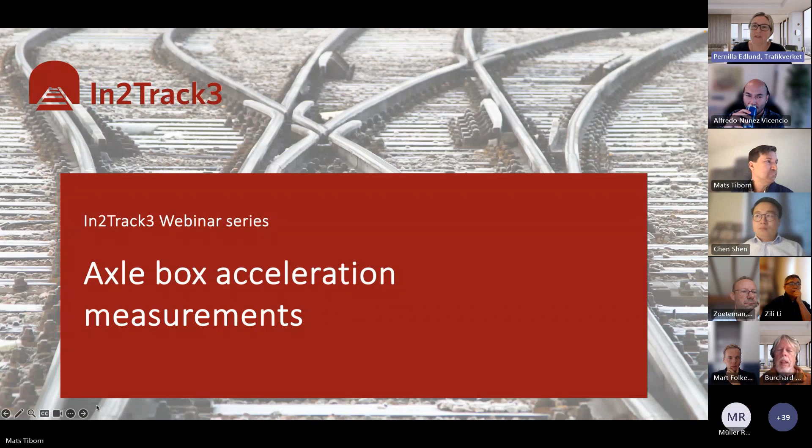I am the coordinator of the IN2TRACK3 project. We started out in 2020 and we are finishing now in 2023. So we have a few months left to go and we're approaching the end with some really nice results and some really nice research. This webinar series is a part of that. We want to share this with you and tell the world what we have done because it's really interesting. So can we move on?

Briefly, the IN2TRACK3 project consists of 26 partners in 11 countries in Europe. It's a European Union project, and we have all sorts of participants, meaning that we have infrastructure managers in the project. We also have the people taking products forward, and we also have universities and research institutions, which give us a broad perspective on how to tackle the issues in railway research. And we try to do that as much as we can. And we also have other projects preceding us, and we can look at them on the next slide.

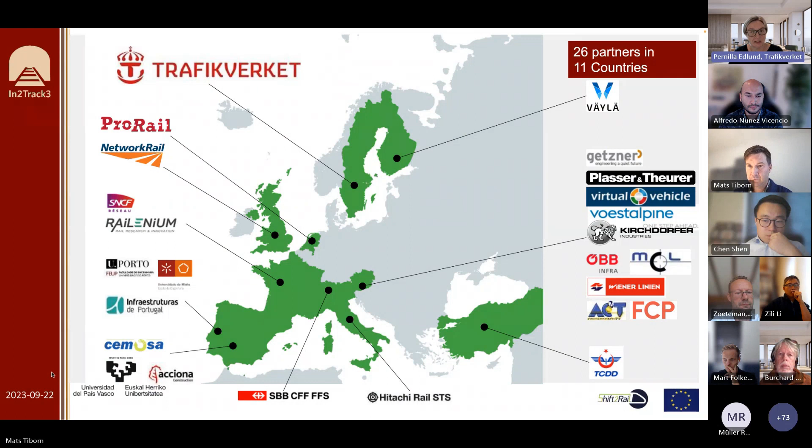Because IN2TRACK3 builds on the work in IN2TRACK2, IN2TRACK1 and In2Rail, and before that other projects as well. The pictures below are merely an illustration of how we have progressed into higher TRL levels. IN2TRACK3 has the aim of having as many TRL 7 products as possible, and we are reaching that goal pretty well. We have over 30 demonstrators showing TRL 7, which means we demonstrate it in an operational environment, which we do in all sorts of aspects of this. We can take the final slide, please.

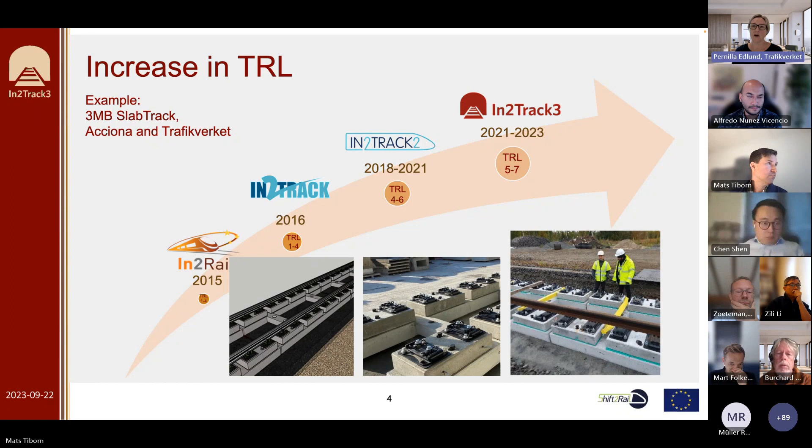This is only showing a few of the things that we have taken forward and which will continue in projects after this and will continue to be worked on. It will move on to other projects as well and other research. Some are very close to industrialization and they will move on in that direction, while other things need more research, more inventions and innovations to function properly. But this is towards the end of the IN2TRACK3 project, so please hear what we have to say on the axle box part.

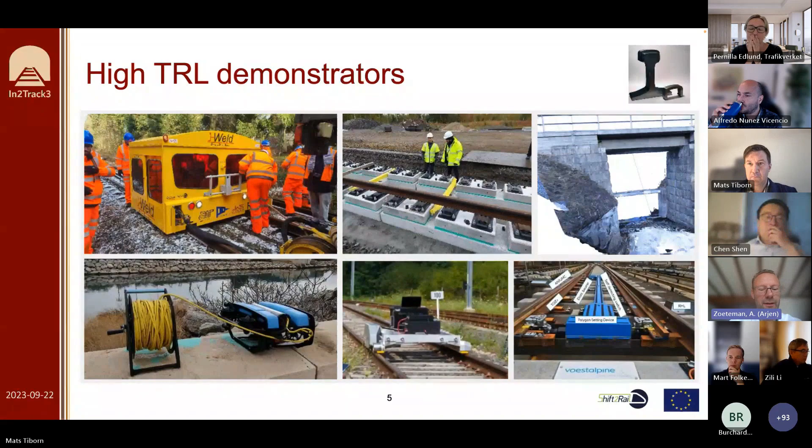We are a member of the IN2TRACK projects; we started first with IN2TRACK2 and then also IN2TRACK3. So we were not there from the very start. But I'm a big fan of what you just showed, also on dissemination and the innovations that we do. It's really worth it for all to check out the website of IN2TRACK3. It's really good. And I think today is also an example on axle box accelerometers. We want to really present to you what we've done.

The research we do on it goes back many years already, together with, for instance, Delft University of Technology, which has been leading it in the Netherlands for many years. And now we also brought what we have developed with ABA into IN2TRACK3, and are continuing that in the EU-Rail project. So we will show what is the state of the art at this moment. There will be presentations from TU Delft, and afterwards we also find it very important to have some application from practice and some feedback from the market. So that's why we approached AssetRail as a user in the Netherlands.

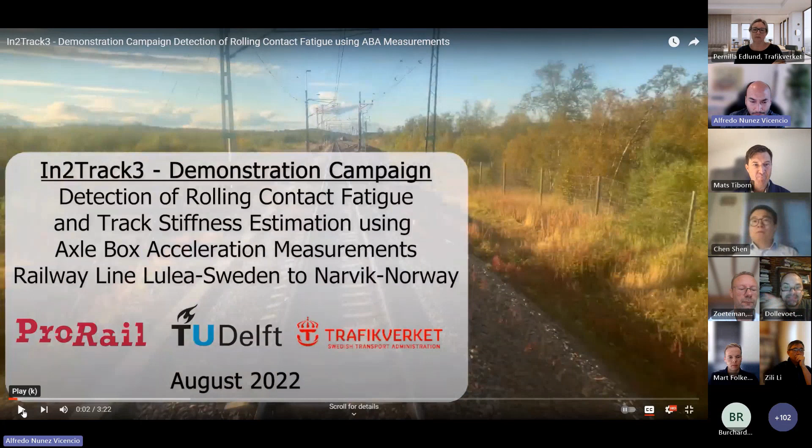And before I give the word to Alfredo and Chen, who will present on what they've done in In2Track3 specifically, I think there is a video to demonstrate. And Alfredo, you will start it. I hope the sound's working. Yes, so I am sharing now the video. Yes, I will put play. I don't hear sound yet.

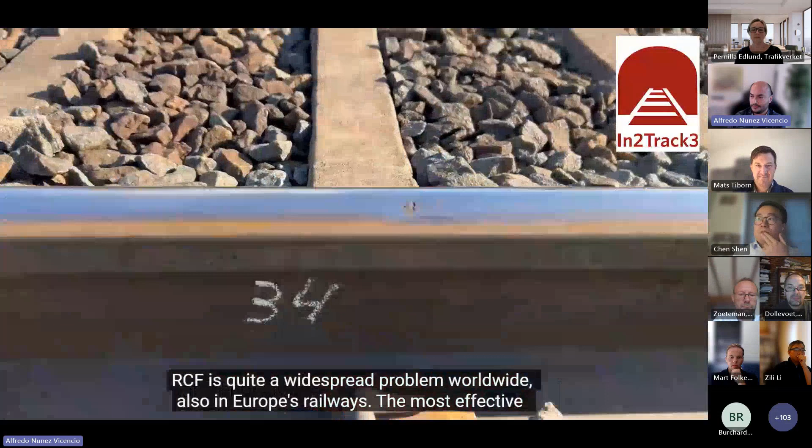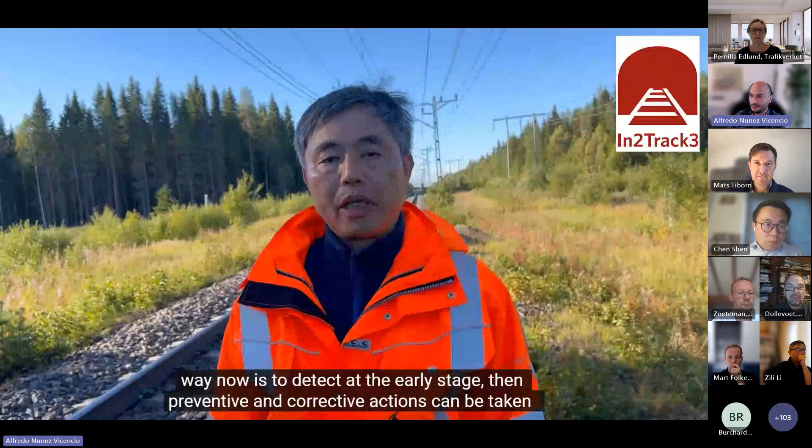Welcome to Sweden. We are on the line between Luleå and Narvik in the demonstration campaign for detection of rolling contact fatigue for the project In2Track3. It's a cooperation between ProRail, Trafikverket and TU Delft. RCF is quite a widespread problem worldwide, also in European railways. And the most effective way now is to detect it at an early stage. Then preventive and corrective action can be taken as soon as possible. And one of the challenges is then to develop an early detection method. This is what we are now doing, and also demonstrating not only in the Netherlands but also outside.

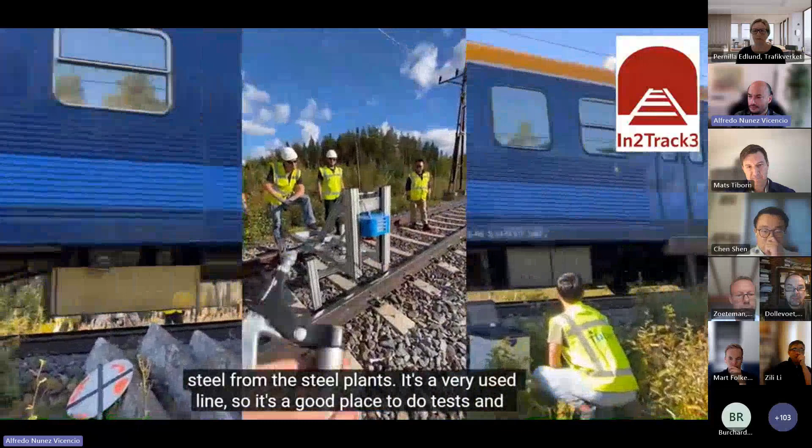I think to have this type of monitoring in service is really efficient for us in Trafikverket, because we can use this for decision making later on. We're at the southern part of the iron ore line between Boden and Luleå, which is quite a trafficked line, both with passengers and the iron ore and the steel from the steel plants. It's a very used line, and so it's a good place to do tests and developments to use all over the rest of the network. We are heading to Narvik in Norway.

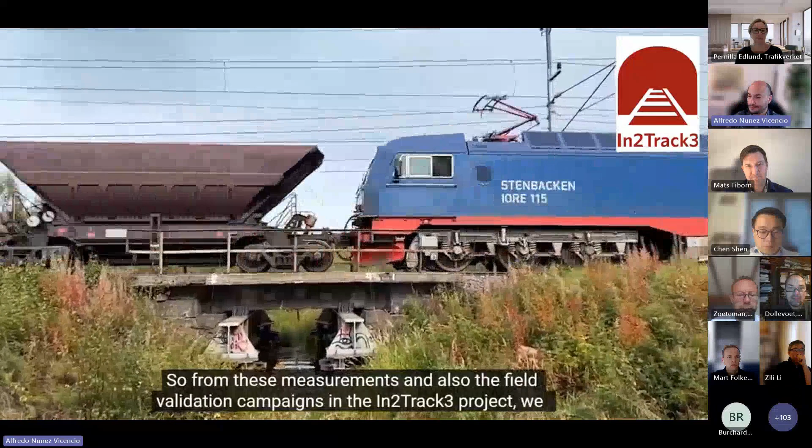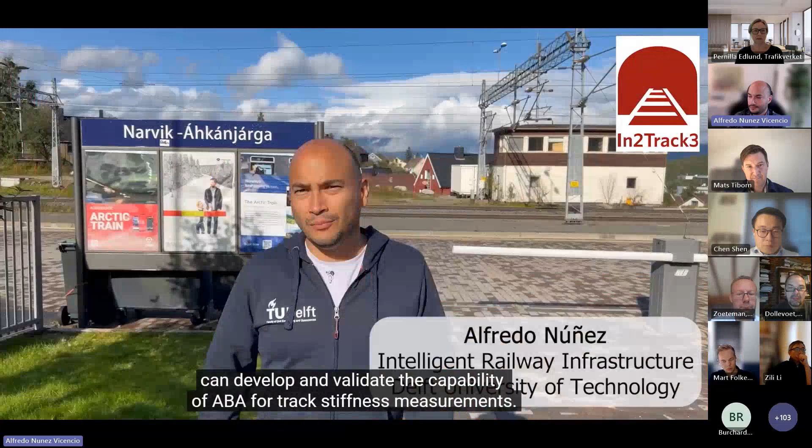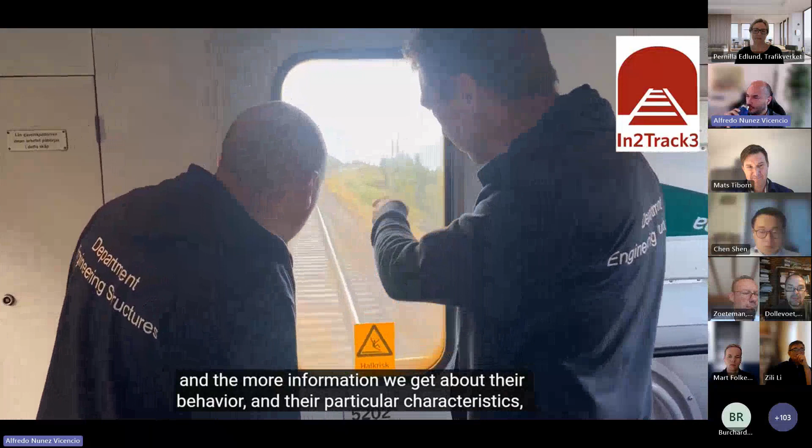So on this train we have axle box acceleration measurement. From the ABA measurements, especially from the frequency domain of the ABA signals, we could get different characteristics of the stiffness of different layers. So from these measurements and also the field validation campaigns for In2Track3, we would hope to develop and validate the capability of ABA for track stiffness measurements. So part of the research is also to have a better understanding of freight-dominated railway lines. And the more information we get about their behavior, the particular characteristics, then we can further extend the monitoring methodologies. This one will grow, and we can measure it with the ABA system that we have seen.

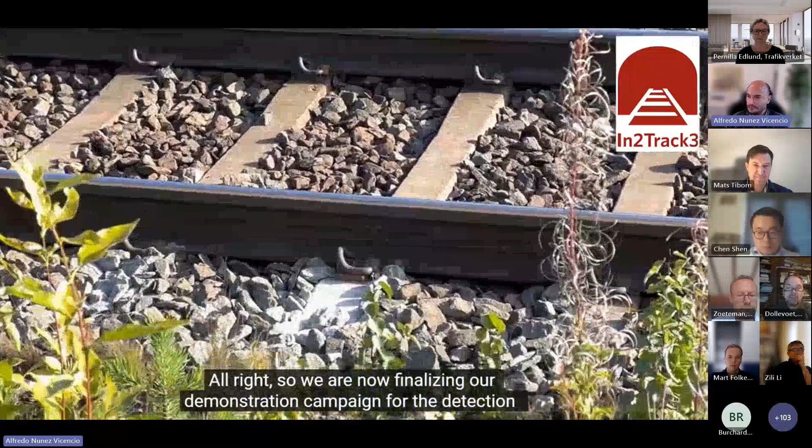If we come back in a couple of months, we will see that the spots will be bigger and bigger and bigger, and finally this rail will break. If you don't do anything, it will break. All right, so we are now finalizing our demonstration campaign for detection of rolling contact fatigue. So we thank a lot the colleagues from Trafikverket that arranged everything and made this campaign happen. And we will see each other soon, I hope.

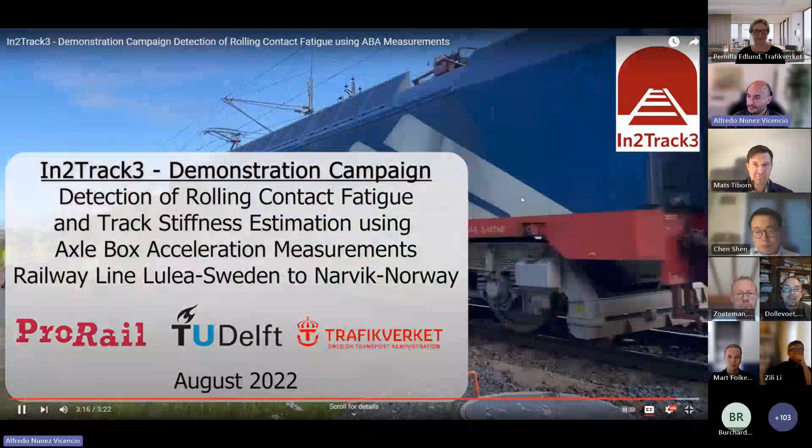Yes, thanks for the video. So that's already an appetizer, I think, for your presentations. And yeah, I think this technology will have a lot to offer.

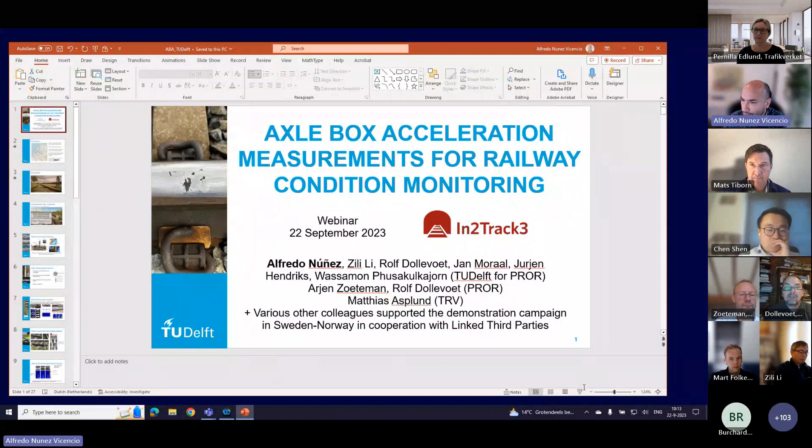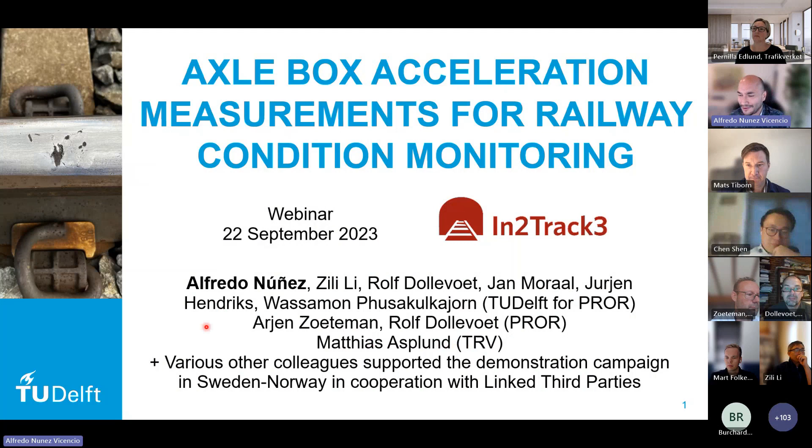Okay, I'll try. So welcome everyone. It's great to have a lot of participants today in this webinar. I'll be talking about axle box acceleration for railway condition monitoring. In the campaign for In2Track3, we have a lot of colleagues involved. So from TU Delft, from ProRail, also Matthias Asplund from Trafikverket, and also other colleagues that supported during the demonstration campaign.

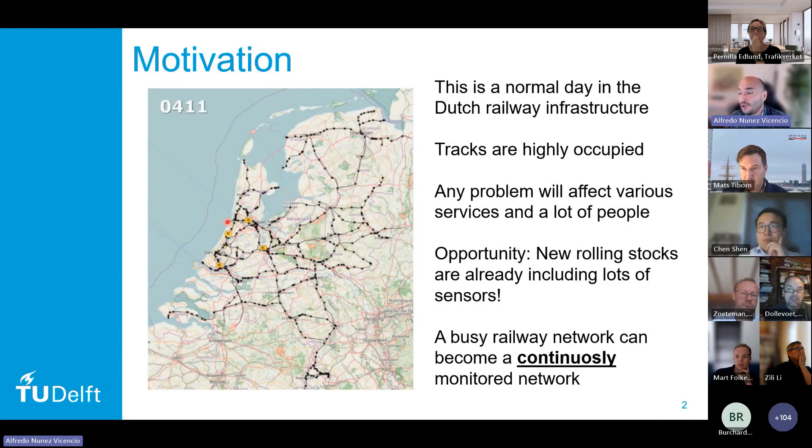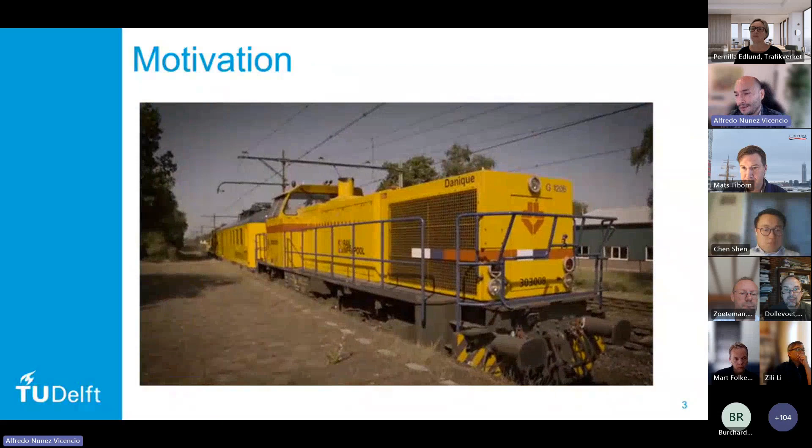And whenever we need information in one region, we could activate the rolling stock that is passing by there, maybe not just with ABA, but also video cameras, lasers, and so on, and we can extract updated knowledge almost in a continuous way about the railway track. So this is the motivation for us to work with monitoring systems that are on board, ideally in passenger trains, to instrument them and collect all the information while on the run.

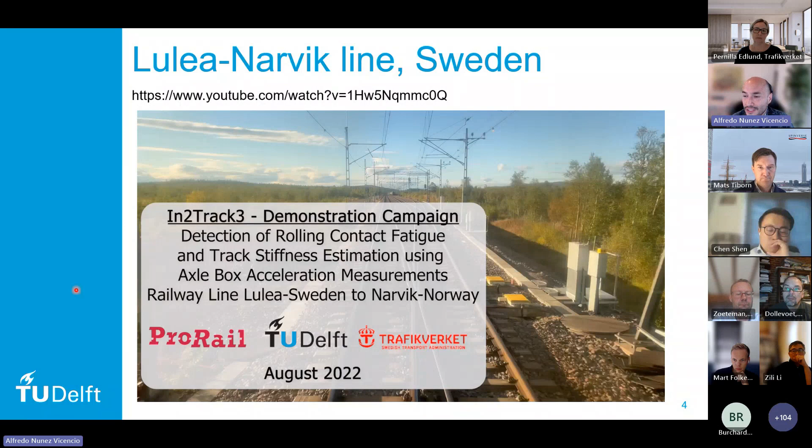Here you can see a video of the CTO train of TU Delft that we use for research. We have tested different technologies in the Netherlands. You saw already the video about the campaign we did in Luleå. In this case, the CTO train was not taken to Sweden, but the colleagues that have the expertise on mounting the technology went to Sweden to install it in a passenger train.

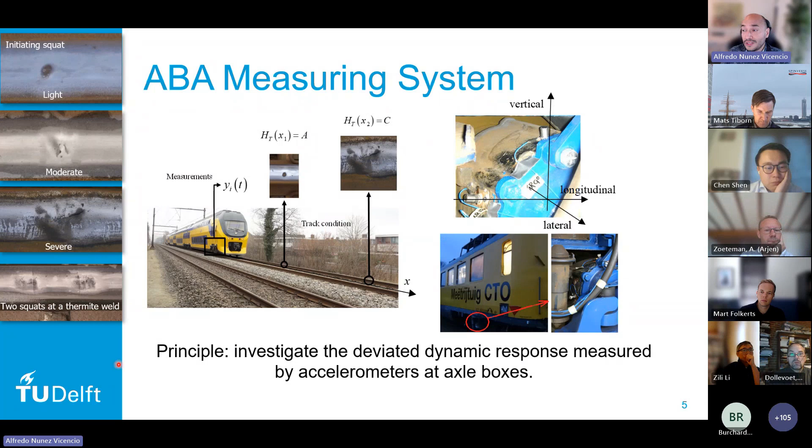In the measurement system, we collect information from the vertical and longitudinal signals. And by using the physics of the problem, the modeling approaches that allow us to understand the track behavior, the ABA behavior at components and at defects, we make use of signal processing techniques to extract all this knowledge and to provide information about the condition of the track.

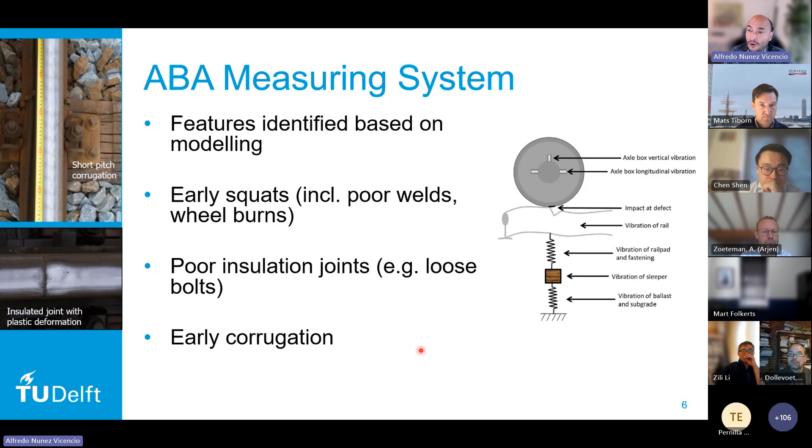Here we have frogs, and the ABA can assess their condition, and also evaluate the quality of maintenance work. In a nominal condition you have a certain response energy level. Once it's degraded, this energy changes. After the frog gets repaired, you can measure again what's the quality of the repair operation. In this case, the signal energy actually increased, so you could use ABA to evaluate the maintenance work.

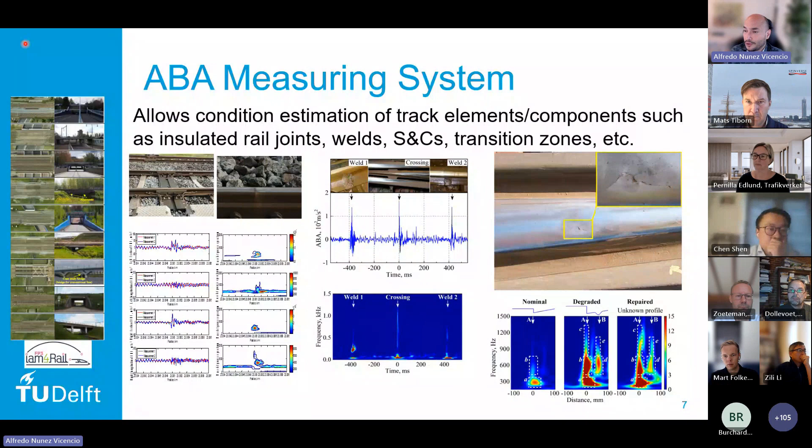Here you can see examples of squats found in the Swedish railways. Let me explain the general principle. At moderate and severe squats, the ABA generates a certain response. Looking at the time frequency analysis shows us the frequencies that are activated. For a certain speed, you typically have a low frequency band that becomes dominant for severe defects. But because squats are short events with small duration, they also excite higher frequencies.

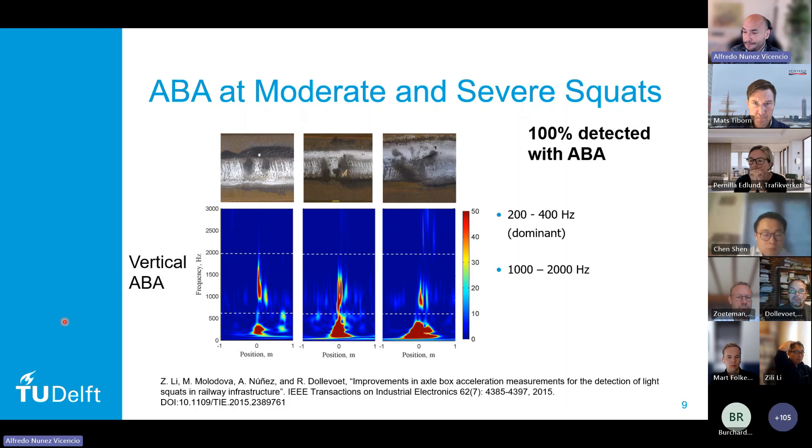For light squats, the technology we've been developing at TU Delft also considers longitudinal signals. Smaller defects create even shorter time duration of excitation. In the case of early stage defects, once they appear and start to evolve, they appear more and more frequently in the signals. There's a moment when we see light, invisible defects that, after every train passing, report an impact, which allows us to claim the system can systematically detect and monitor them because of the physical response.

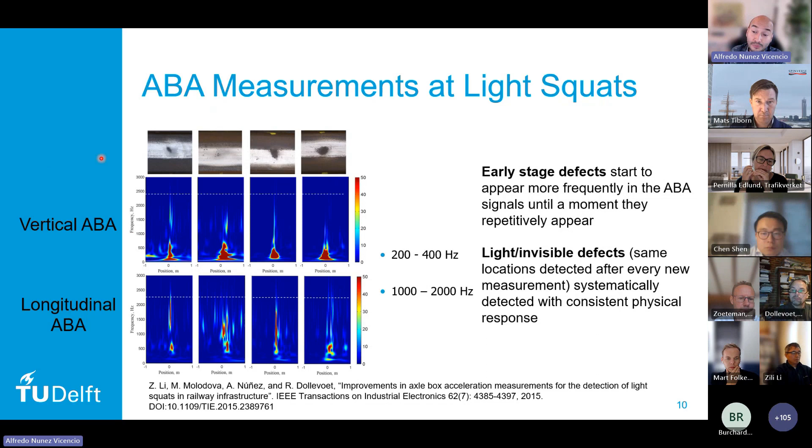Why detect early defects or later defects, and why do it continuously? The reason is that some small defects are candidates for effective grinding—meaning that with a certain depth of grinding, you can completely remove them from the rail surface. But when defects grow too much, grinding won't be effective; you can apply grinding, but the defect will appear again and again.

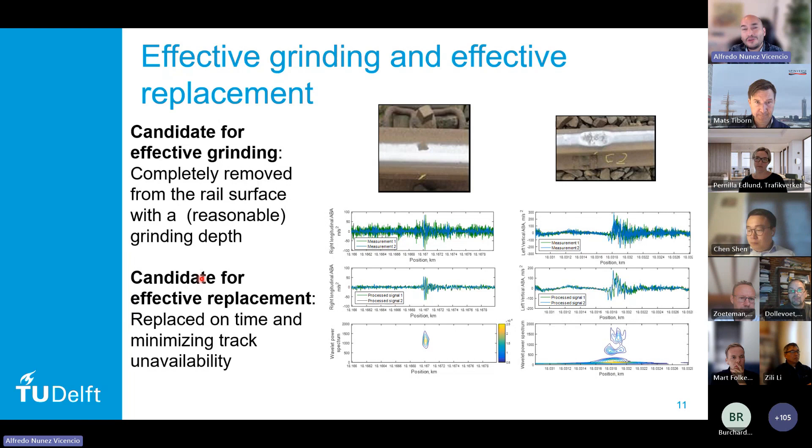For severe defects that can't be removed by grinding, effective replacement becomes important, because you can guarantee safety, and also estimate in which maintenance campaign this defect could be replaced. So you don't need to wait until the rail breaks, but optimize and maneuver a bit with the maintenance operation.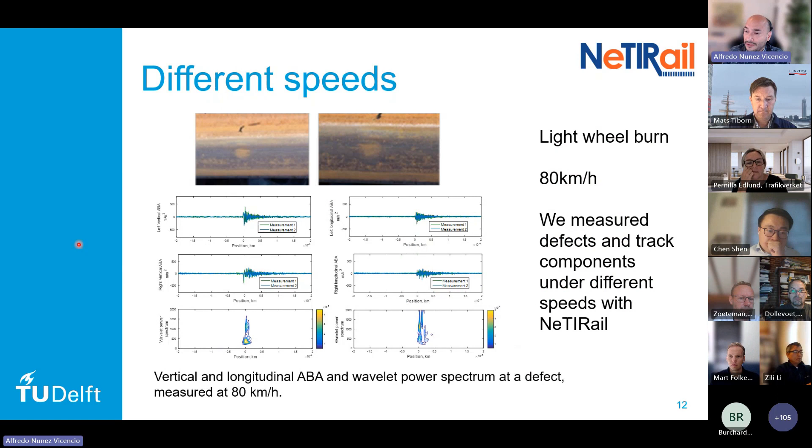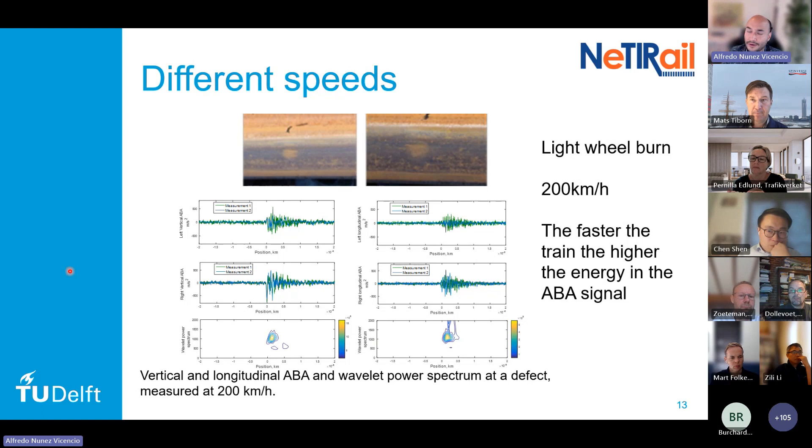In detection, this is a dynamic measurement, so we have different speeds. For example, we show wheel burns at 80 kilometers per hour—you see the responses. At 200 kilometers, the same defects have a much higher excitation. So the faster the train, the higher the energy of ABA. In real life detection with variations of speed, the signatures can be adapted based on their frequency, wavelength, and the train's speed.

For Luleå and Narvik, we conducted a comprehensive measurement campaign. As mentioned in the video, this is mixed traffic. We mounted the sensors in the passenger train, but there are also iron ore trains and freight trains that are super heavy. This is more or less how the campaign looked. I'll show you some other tests later.

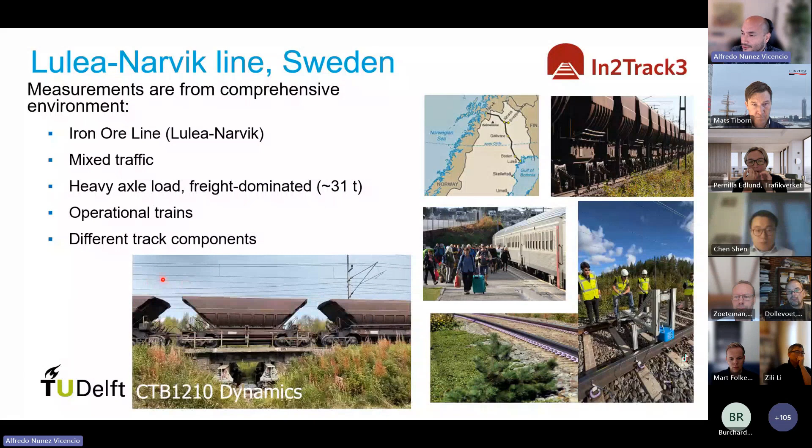Let me show you the campaign. We did two rounds between Luleå and Narvik. Some colleagues traveled with the van from Delft to Luleå—took them about three days, I think. Then that was the installation. The train went from Luleå, we passed the polar circle, arrived at Kiruna, and went further to Narvik.

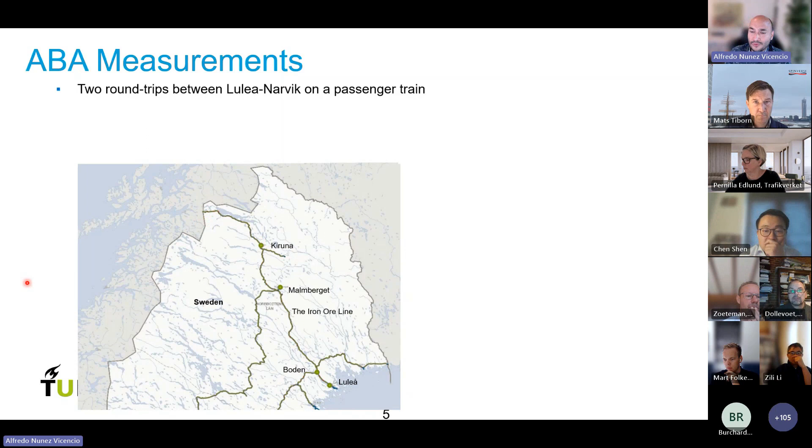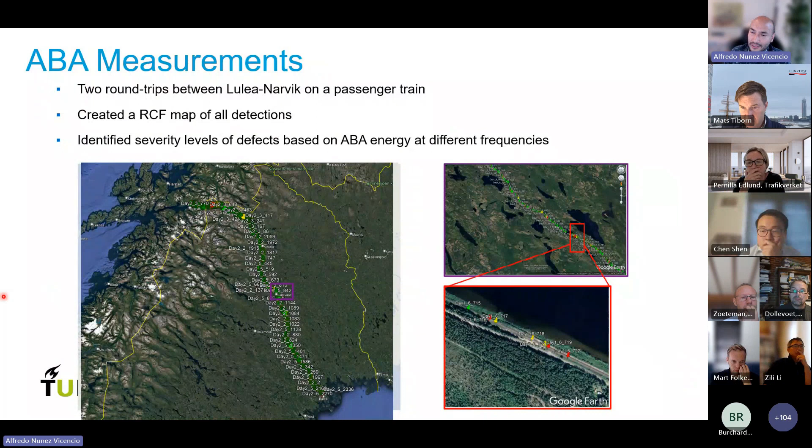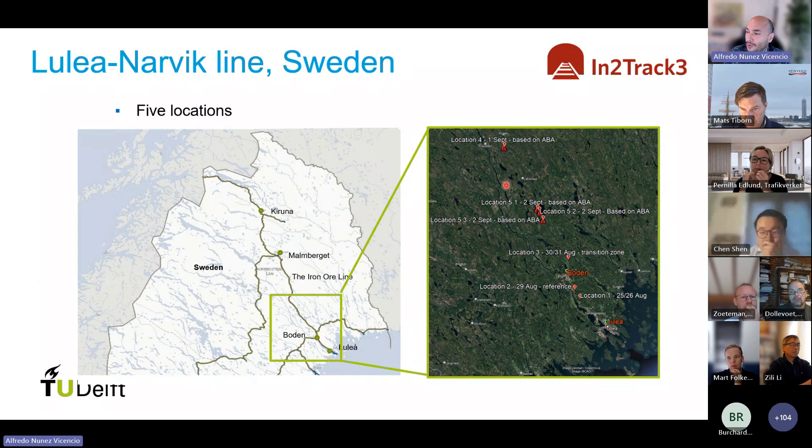We created RCF maps for general detection, identifying severity of defects at different frequencies. We designed a validation campaign in 5 different locations in the Swedish part, all near Luleå. We went first to two of the locations, then after some preliminary analysis, went to locations 3, 4, and 5.

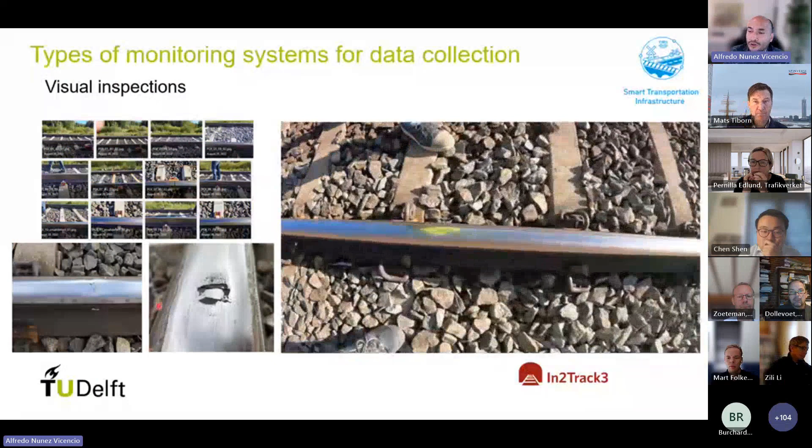For validation, we performed visual inspections for which we registered photos. We also did a GoPro video to verify we weren't missing defects. In the locations, geometric measurements were also conducted, and for a few defects, we did some 3D scans.

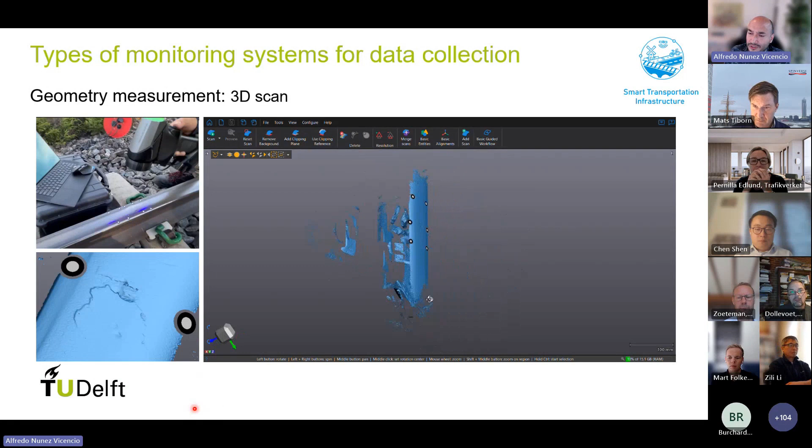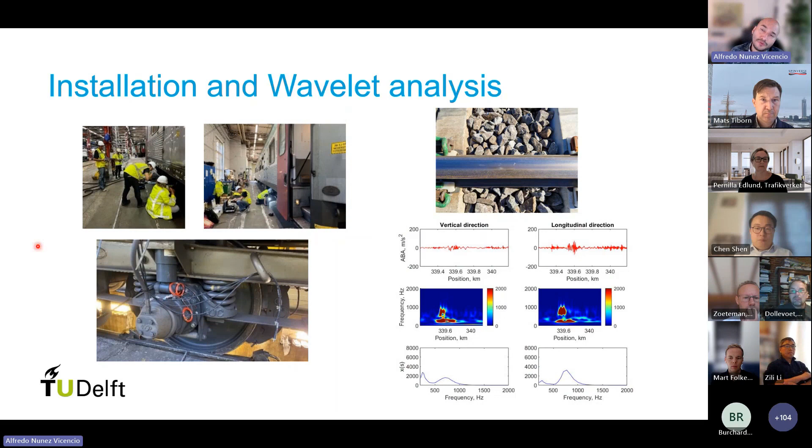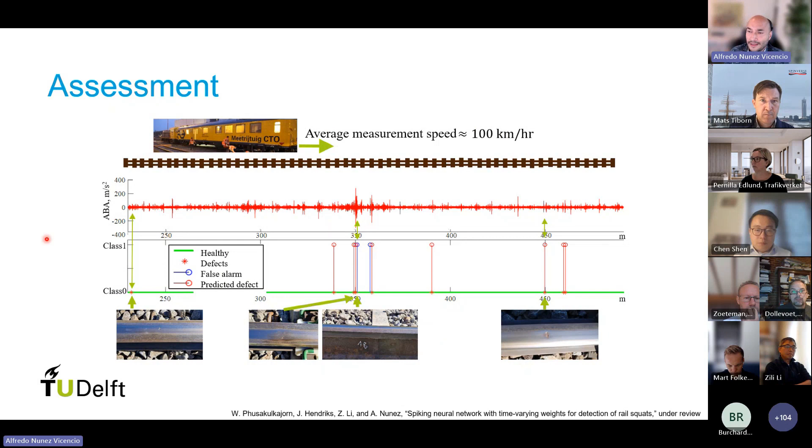So for the ABA part, these are some pictures of the installation. What we did for analysis was to analyze the wavelet responses of the signals. Then basically the train was passing over here, and we detected the map of locations and defects. Later we compared field test results with the analysis.

The key findings: all of the squats that we observed in the 5 locations were detected with the ABA. The ABA also indicated the locations. The principle is that it detects locations with higher impact excitation energy.

That's part of the method, and it can be useful for instance for monitoring of welds and the effect of a small defect. Also for detection of severe defects, this technique was run almost in real time.

So as our colleague, Jurjen Hendriks, was on the train, he could provide us with the most interesting locations to visit. So the new sensing technologies and systems allow almost online processing, overcoming the problem of the big data set that we have to collect.

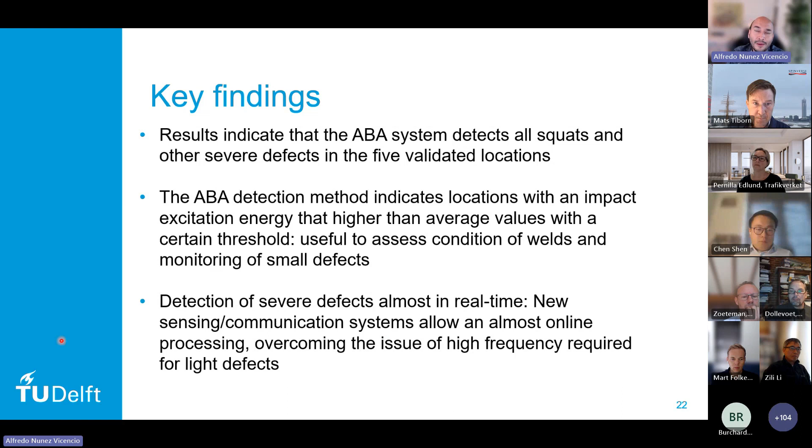So the more information we have about the field, and matching what we observe in the field with the measurements, it increases the decision powers. It allows us to maneuver and to decide on the best maintenance strategies.

So as a recommendation from this study, the system will be even more powerful and it will help also the other measurement systems when integrated into existing rail asset management tools. That is because of the physical interpretability of ABA, but it will also help other systems.

Although ABA requires some advanced time frequency tools, the signals are insightful, and they can be used and converted into KPIs that allow for simple indication for maintenance decisions at a higher level.

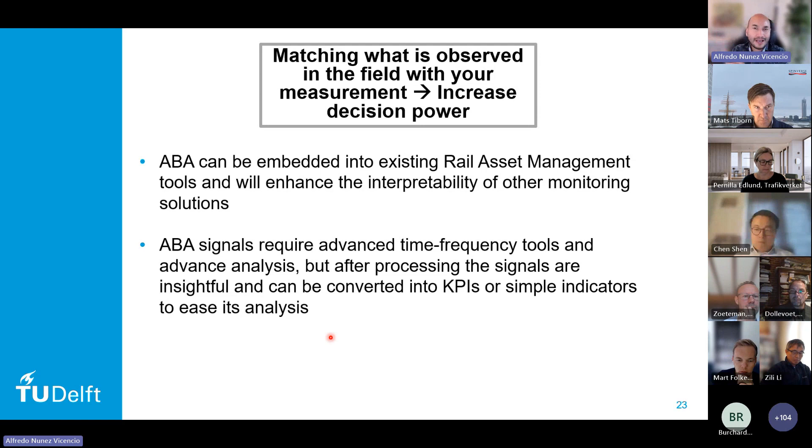And then as for the research on rolling contact fatigue, validation of KPIs, key performance indicators, will be interesting. Also to evaluate the work orders, for instance the grinding clustering to decide where to grind, to evaluate grinding techniques based on ABA information - that could be of major interest.

And also the refined positioning. So nowadays the rolling stock will bring together the system so we can align it not just with the GPS, but also with the tachometers and train information that will allow much better positioning.

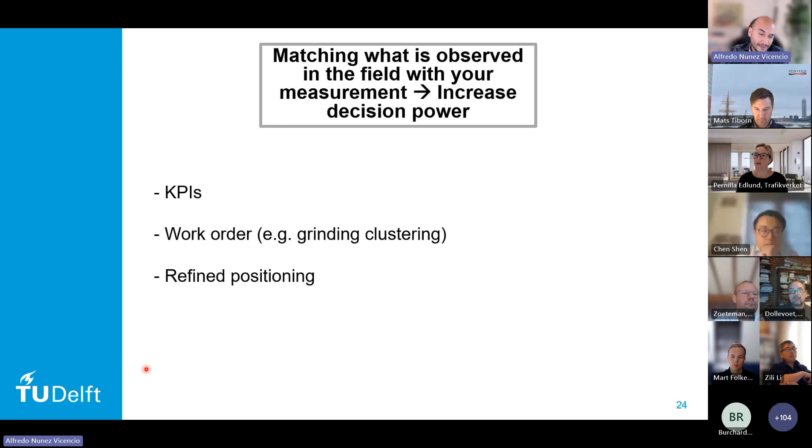So for instance, we install a GPS antenna, and of course we know that in the tunnels this didn't work in terms of the positioning, although the responses and the signatures of the track got captured anyway.

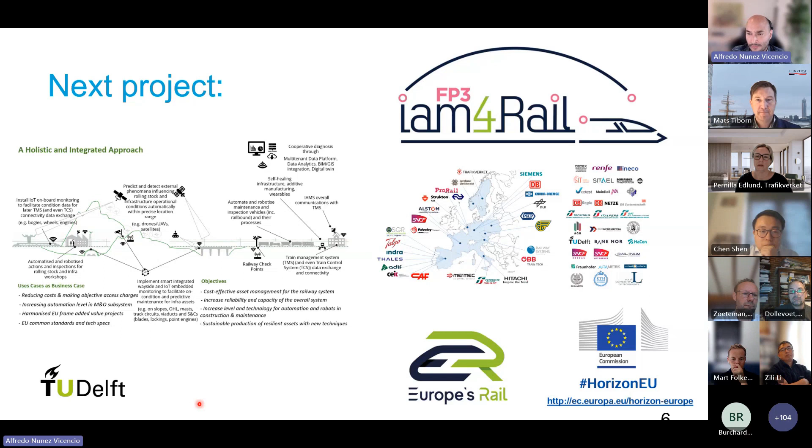So I acknowledge all the colleagues that support us, and for the next project we are working also for IAM4Rail, embedding the ABA system with other technologies such as laser Doppler vibrometers. Thank you very much for your attention.

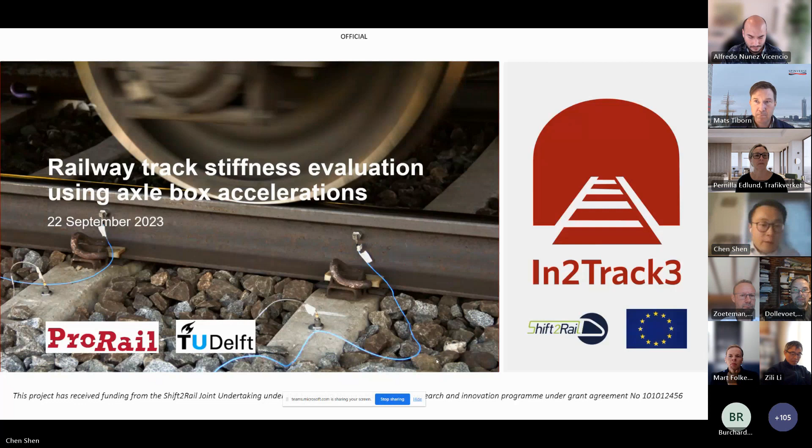Yes, okay. So as Pernilla and Arjen already mentioned, this is a continuation work of In2Track2, using the ABA technique to evaluate railway track stiffness. In In2Track2, we validated the technique in the lab. The goal of In2Track3 is to further validate it in industrially relevant environments, at TRL level 5. I'll start my presentation with a short introduction of why we want to measure track stiffness.

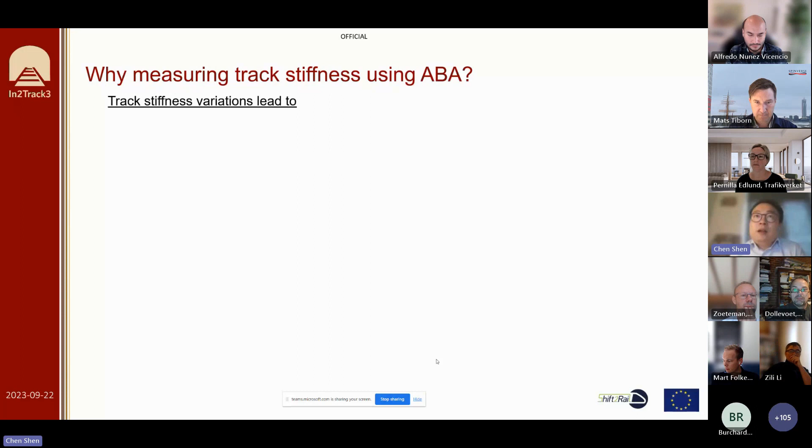Because track stiffness, especially its variations in space, leads to increased wheel and rail force. Here's a video showing a loosened fastening system, which I don't know if you could hear from the video - there's impact noise from it.

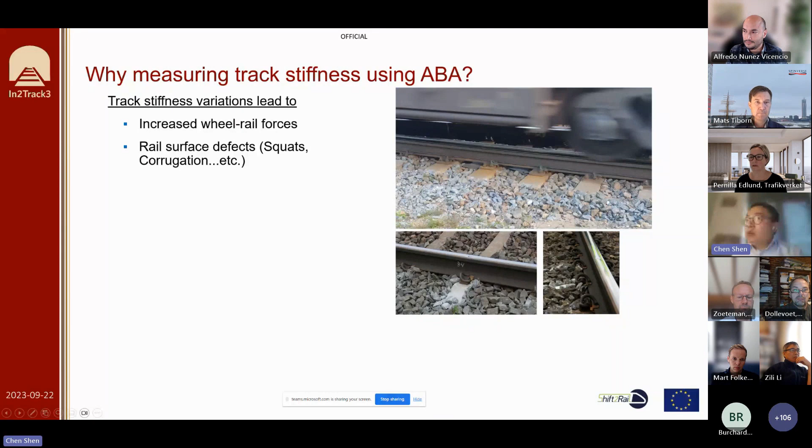These increased wheel and rail forces, if in the high frequency domain, could probably lead to defects on the rail surface, such as squats and corrugations. And if it's in the low frequency domain, it travels further down and could lead to track geometry degradations, for example especially at transition zones. So all of these would eventually result in increased maintenance costs.

Existing technologies for evaluating track stiffness use specialized measurement vehicles, but they usually only measure at a relatively low speed and can only excite the track at relatively low frequencies. For in-service vehicle techniques, most of these only measure the stiffness at a single layer, looking at the overall supporting stiffness, and there's a lack of field validation.

The basic principle of measuring track stiffness, as shown in the presentation by Alfredo, is to look at the vehicle track as an integrated system, so the axle box acceleration (ABA) can reveal the underlying track properties, including track stiffness in particular. Each layer of these track components may result in different vibration characteristics in the ABA. If these characteristics could be captured by ABA, it could be used to measure the dynamic properties or stiffness of different track layers.

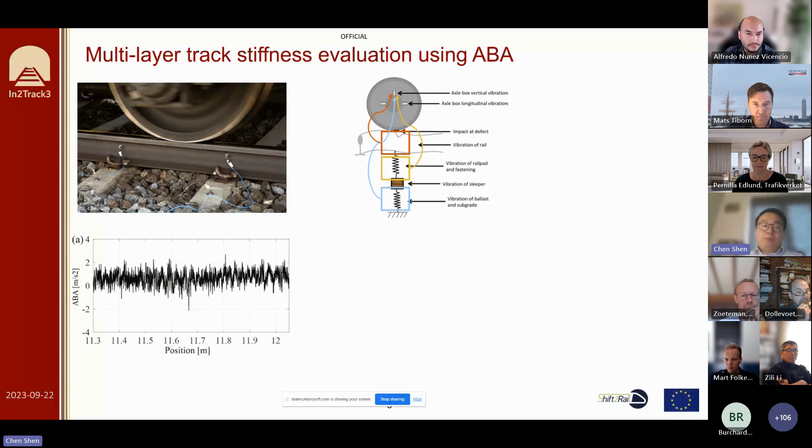The problem is how do we distinguish those characteristics from the ABA? If we look at the time domain signal, it doesn't tell us much about the dynamic characteristics. But if we transform it into a time-frequency domain, we can see the characteristics are also layered, and rightfully so, because the vehicle-track dynamic interaction system has high frequency vibrations at the top of the system and low frequency vibrations at the lower part of the system.

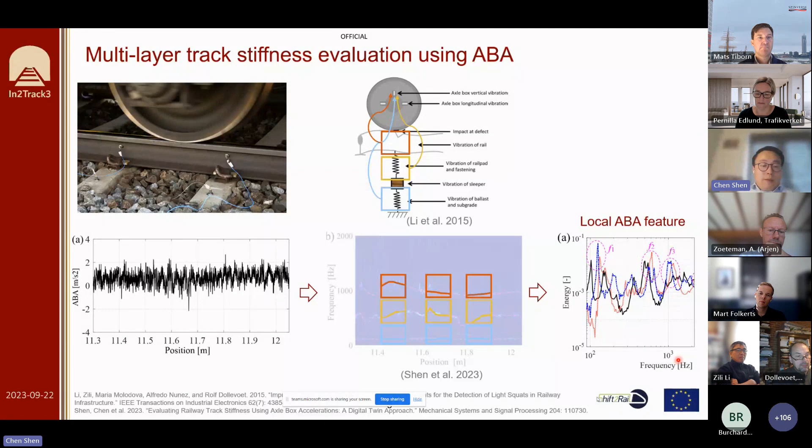If we could measure the dynamic characteristics from the ABA at different locations, we may be able to identify stiffness variations based on these characteristics. In this technique, we propose to use a local frequency feature: we take a window of this time-frequency representation and project it to the frequency space.

The question now is how do we establish a relationship between these ABA features and the track stiffness at different layers? We used a vehicle track interaction model, the VTI model, to establish this relationship. We start with the parameter space, where KB is the ballast stiffness and KP is the rail pad stiffness. We sample from this parameter space to represent different track conditions and use that as input to the VTI model.

Then we get the ABA features corresponding to different combinations of rail pad and ballast stiffness. With that we can build a discrete relationship — for example, the red dot would correspond to the red curve or red features in the feature space, and the yellow dot would correspond to the yellow feature in the feature space. With all these, we build a database with the input of track stiffness and output of ABA features. Based on this database, we train data-driven models that establish a relationship between the ABA feature and the track stiffness.

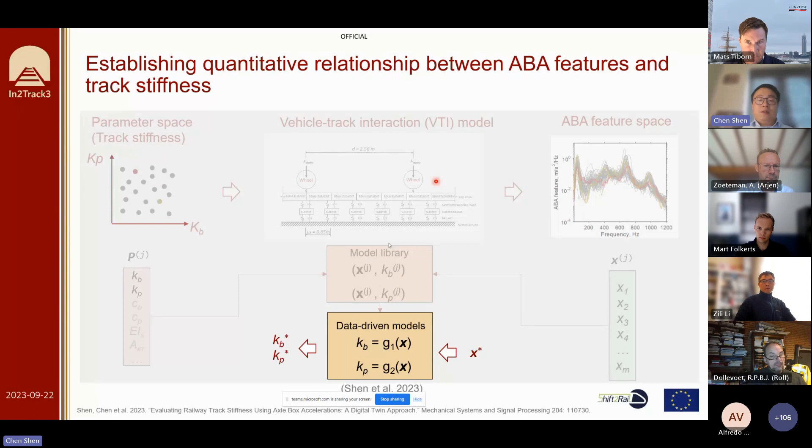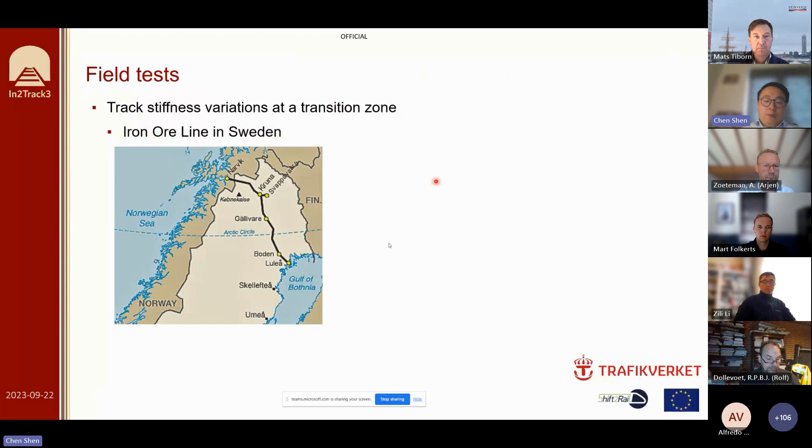Here I show the validation of this method in a field test on the Iron Ore Line in Sweden. We chose a transition zone, a bridge and transition zone, where we evaluate the stiffness variations. We received great support from the Swedish Transport Administration for this field test, and I would like to acknowledge that.

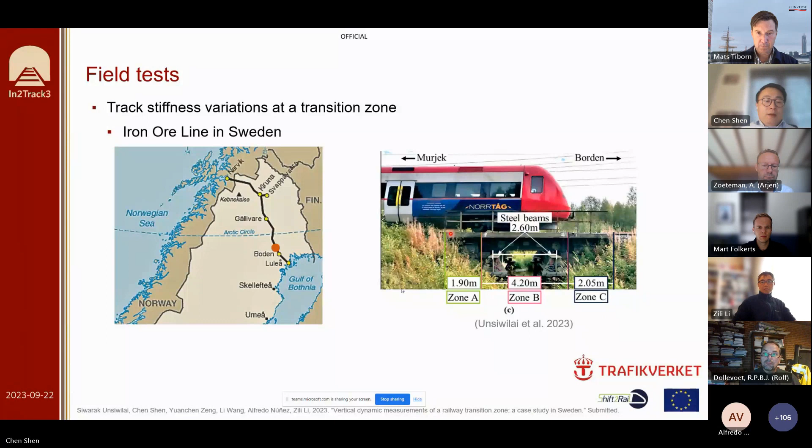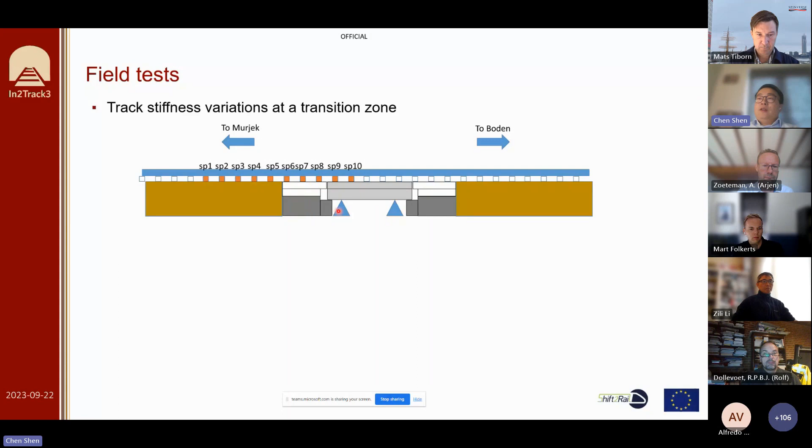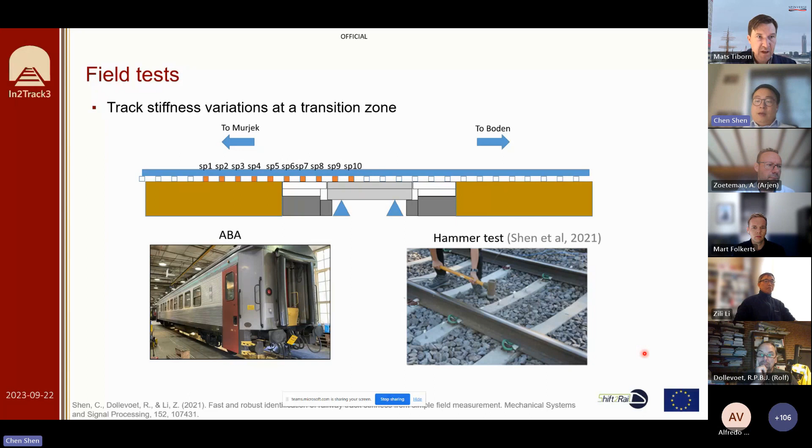More specifically, we're looking at the stiffness support at these 10 sleepers from the embankment to the bridge. We instrumented a passenger wagon that travels frequently on this line with axle box accelerometers, and we also conducted hammer tests at this location, so that the hammer test results could be used as validation of the evaluation by the ABA.

Can you end in 1 minute? Yeah, I'll try. Thank you.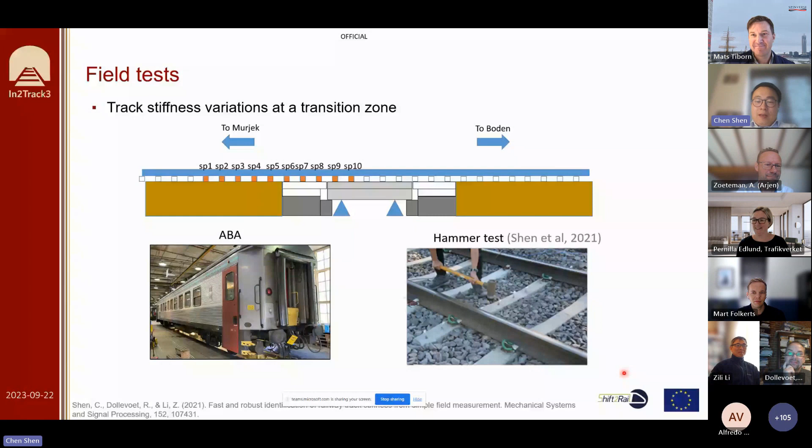This is basically the test we've done. The first step is to validate our models.

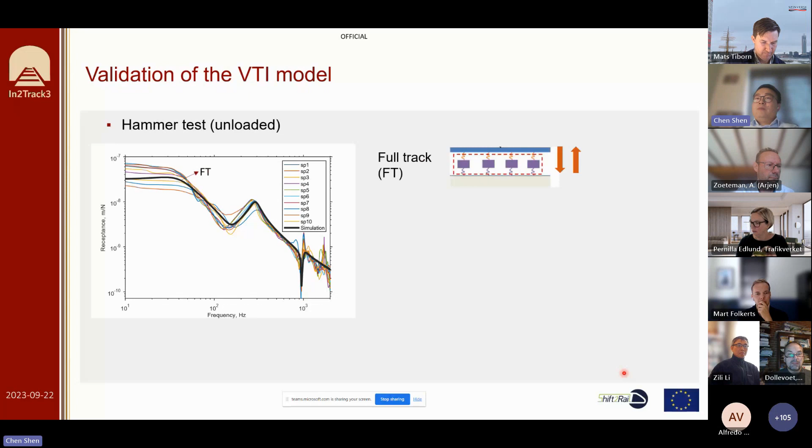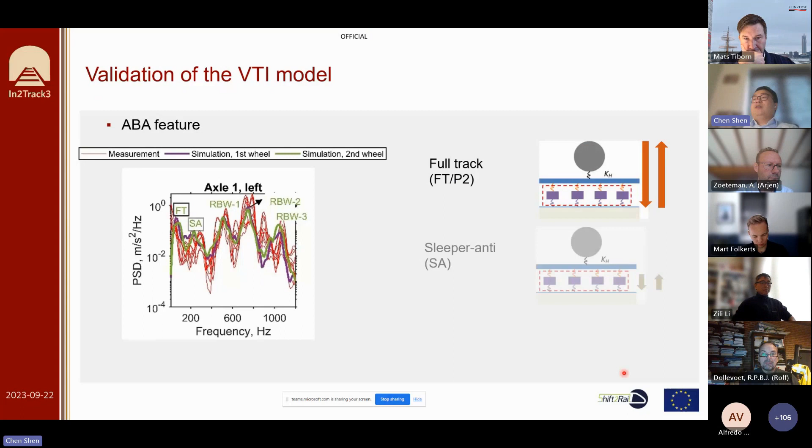So this is the validation of our model. The black line is the simulation, and the others are the measurements. So this is the hammer test result. It reflects some dynamic characteristics of the track. And this is the validation with the ABA features. So the red lines are the measurements, and the other two lines are the simulation results. And we can see also multiple characteristic frequencies that correspond to different resonances of the system. So that could be used to distinguish the stiffness in different layers.

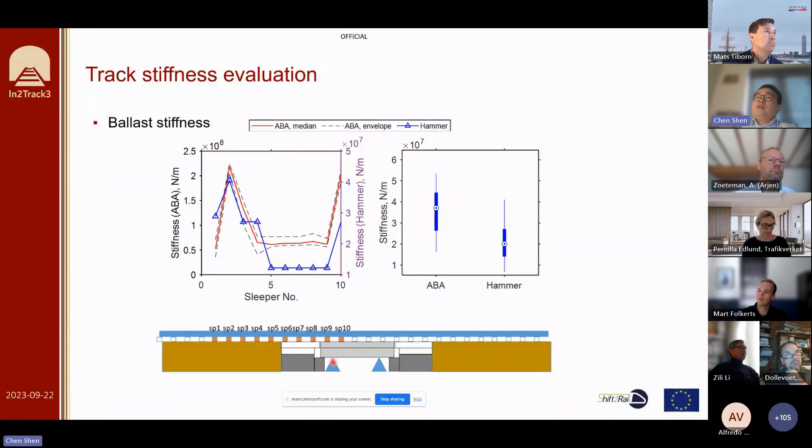And if we look at the structure variations, actually we could see that the support stiffness of ballast decreases in the transition zone towards the bridge. And between sleepers 6, 7, and 8, it's actually constant. But at sleepers 9 and 10, it increases again because there is still support here at the bridge.

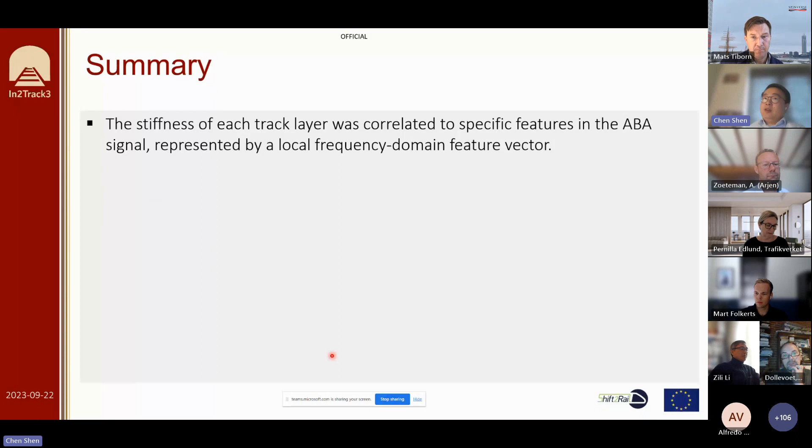So here's a short summary of what I've presented. The stiffness of each track layer was correlated to specific features in ABA signals, represented by a local frequency domain feature vector. The technique was validated in an operational line by comparing the stiffness evaluated using ABA from an in-service vehicle with that obtained from hammer tests. And in future, we would further demonstrate the effectiveness and application of this technique under different track operational conditions. And in practice, we would use frequent ABA measurements to gain better understanding of the track stiffness changes over time, to better inform the maintenance decisions.

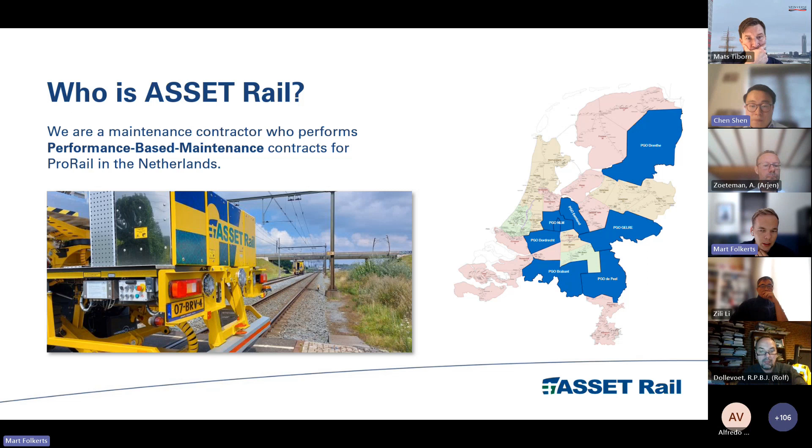To make sure that we have as few delays as possible, we also decided back in 2017, after contact with Rolf and also Julian Hendrik from TU Delft, that it's interesting to do a test with ABA measurements. Well, in the last 5 years, we've done several, which gives us a lot of interesting information about the condition of the tracks. We also used the CTO train where the axle box accelerometers are already on.

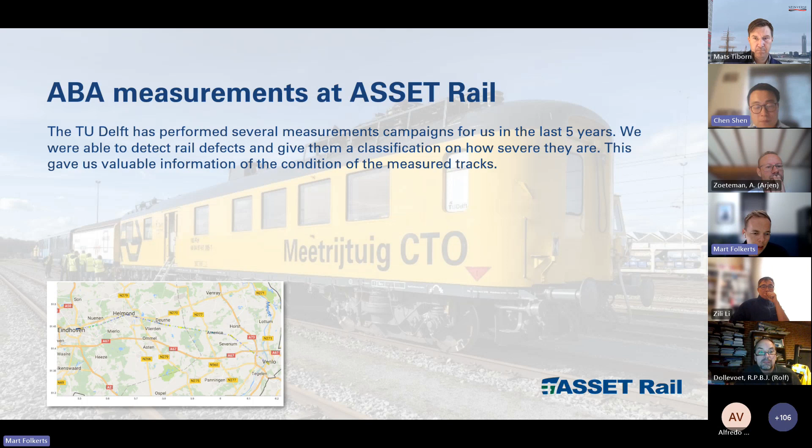And the insights that we gathered were on the one side very positive. So what we did, we used the different defects that came out of the measurements. We analyzed them and we used a sort of clustering algorithm to decide where do we need to grind? Where do we need to mill?

Where are severe defects and where are less severe defects? But at the end, we still decided to not use it for our decision making. And there are a few reasons for that. I've summarized them over here. The cost of the measurements and also the corrective actions behind that are very high. And as a contractor, we always look at the costs.

And what's also a big thing for us is, if we do the measurements and the analysis and the corrective actions, we're not sure if the defect is really gone. And that's because from the measurement, we can't estimate the depth of the defect. We can make an estimation, but we're not sure. So if we perform a milling exercise, we're not sure if everything is gone, and we still have to do an ultrasonic measurement to check, hey, is everything gone or is there something still there? And if there's something still there, then it's even less interesting to perform it like this.

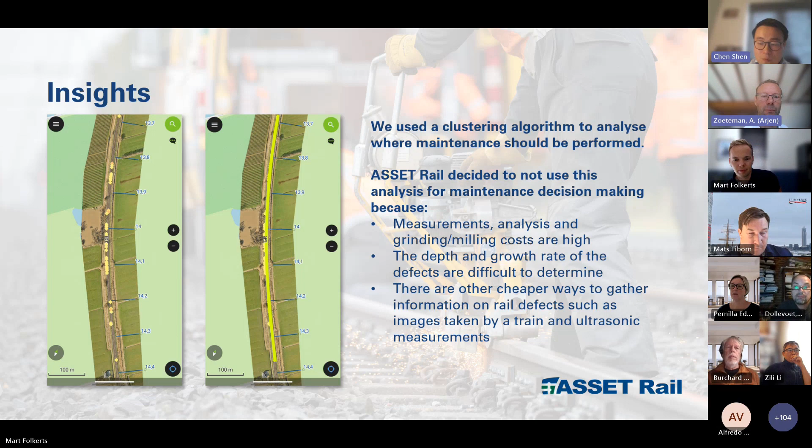Yeah, I think this is good. But this definitely needs to move on to a question on the panel, because this is a good interaction between practice and researchers. So we're not ready. That's what we know. But maybe better for time reasons first to ask Burkhard also for 5 minutes, and then we have the combined picture of practice, and we can have the interaction. But definitely we have to come back to what you just presented. So if Burkhard is ready for only 5 minutes.

Okay, I will do my best. Will you present, Burkhard, or should I do it? No, I try. Normally you should see my screen. Oh yeah. Yes. Okay.

So before I start my short presentation, I want to make a short introduction about my person. My name is Burkhard Ripke, and I've been working at Deutsche Bahn for a long time, and have been dealing with the topic monitoring with ABA for more than 10 years. We have a team at DB Netz which is working on this topic, and we get new people now, so we have more people to work on this, and this shows the attractive system. So we expect a lot of information from this.

But the real challenge for me is now to tell about this interesting topic in 5 minutes. So hopefully I have only 2 slides to reduce the time, but I think it is a really interesting topic. Okay, I have 2 parts in my presentation. One is to see what is the status quo at the moment.

So if I look at today, we are operating nearly 10 trains. If you take into account working trains, where we are now also installing monitoring technology, we have more than 10 trains. And the maximum speed is up to 300 kilometers per hour. This means we also have an ICE 3 train equipped with monitoring technology, and we use all these trains to monitor at the moment, I think, 3,000 kilometers of the network each week.

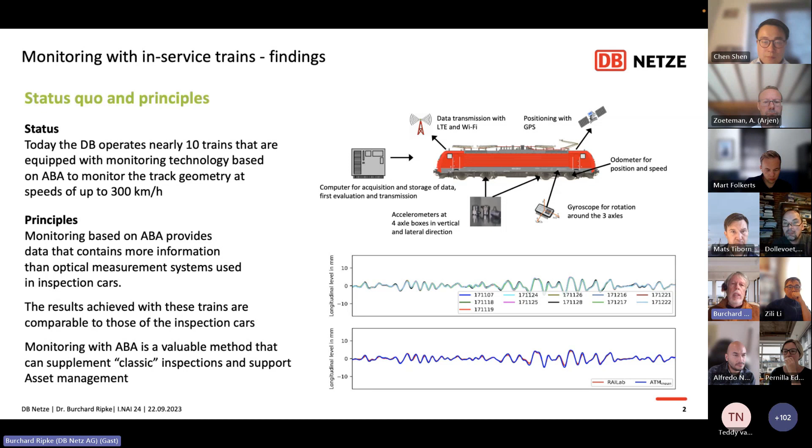If I look at the applications we are working on and partly using, we are looking, for example, at track geometry monitoring, which bridges the gap between inspections. In Germany, according to the standards, our maintenance and inspection depend on the speed of the line, not on the load on the line. On the rail freight corridor 1, for example, we have monitoring intervals of 6 to 12 months, depending on the speed of the sections. So it's very good that our locomotive runs each week at least twice, and therefore we close the gap and can identify maintenance needs. This is a really good application for monitoring.

The second is that we want to combine the maintenance of the track geometry in the track and in switches and crossings to have more efficient maintenance, and therefore we also use ABA for monitoring the transition geometry in switches and crossings. This is also an application where we may be able, within IAM4Rail, the newest project we are working on, to make a prediction, not only to see the current state of the transition geometry, but also use it for prediction.

A new method we have been doing since this year is to monitor the sustainability of maintenance measures. This means, especially if we have a rebuild of a track and we know something went wrong during it because of bad weather conditions or not enough time, we use monitoring to look at the sustainability of the maintenance measure, whether it works or not. Do we get problems? And if you look at the whole network, we can also see the impact of different building or maintenance strategies on sustainability.

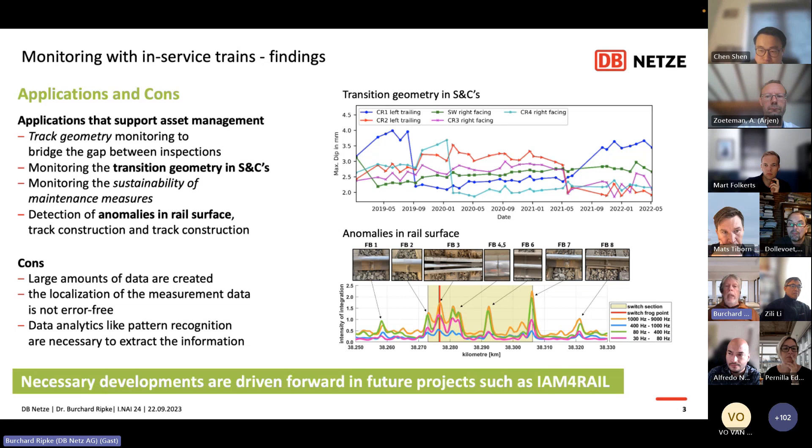And the last one is that we need special data analytics like pattern recognition to extract the right information and to get more about the amplitudes and the characteristics. So this means we need further development, and this is driven in future projects such as IAM4Rail.